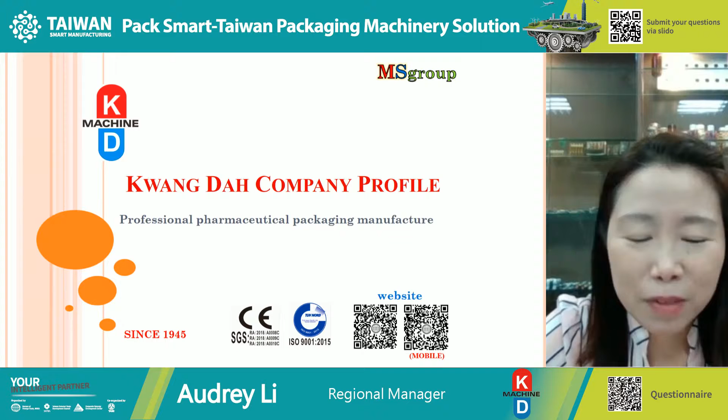Our content of presentation today: we are Kwang Dah, the largest manufacturer of pharmaceutical packing machinery in Taiwan for 75 years, and that's why we say we are the most professional one in the packing industry. There are more than 30,000 machines sold by us in 70 countries of the world. We are an expert not only in customized OEM and ODM, but also Industry 4.0 technology of smart machinery. We will have more detail, description and video later.

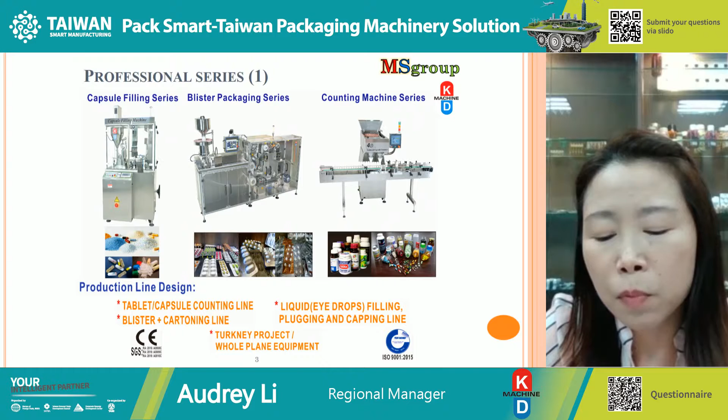Our major equipment includes the capsule filling machine, which uses a tube filling system that can fill powder or granule into the capsule. The blister packing line has a rotary sealing system which can keep your product fresh, whether capsule or tablet, 4 times longer than with other sealing systems. We also have tablet and capsule counting and packing lines with 4D detecting and 100% accuracy counting systems. You may choose to operate an individual machine, or we could combine machines for you to form a production line.

Here are our liquid filling line and cartoning labeling machines. We also have powder processing equipment and turnkey projects. Our major clients are in pharmaceutical, nutrition, health supplement, biotech, natural food, and cosmetic industries.

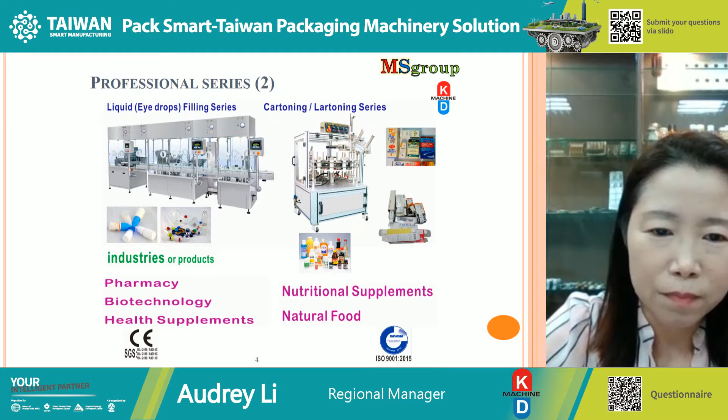Now we would like to talk more about the ability of Kwang Dah. Kwang Dah is a parent company in the Multi-Spring Group. We have 8 companies in the industry of packing equipment, electronics including IC, IT and programming, and land development and construction. Three of us are listed companies. Kwang Dah is the expert in Industry 4.0 smart packing machinery and customizability, because of not only 75 years of experience but also this background.

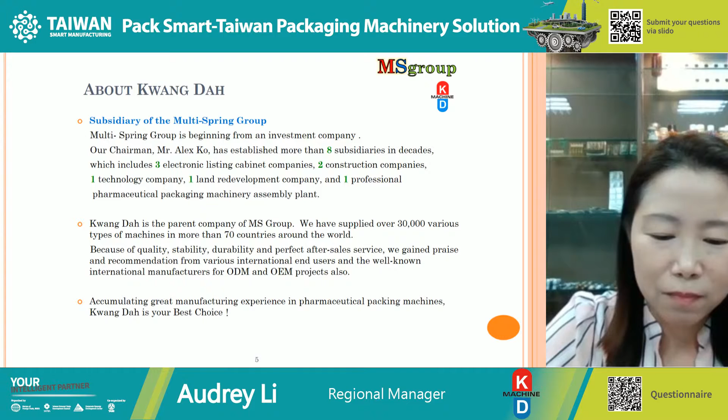As we know, real-time monitoring and management technology, the SCADA system in IIoT, is a common specification for Industry 4.0 machine tools now, but not so usual in packing machinery. We already have the most mature and stable SCADA IIoT technology for smart machines, to help management monitor, control, analyze and correct in real time by your cell phone, tablet, notebook or PC. You will see the production data, including security, utilization rate, preventive maintenance reminders, and even abnormal vibration of equipment on the overview screen.

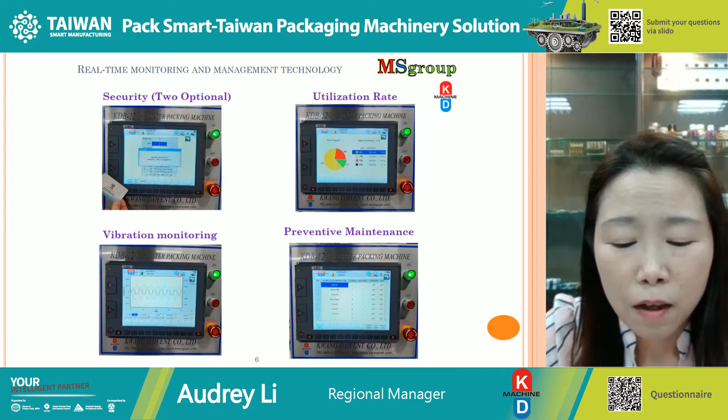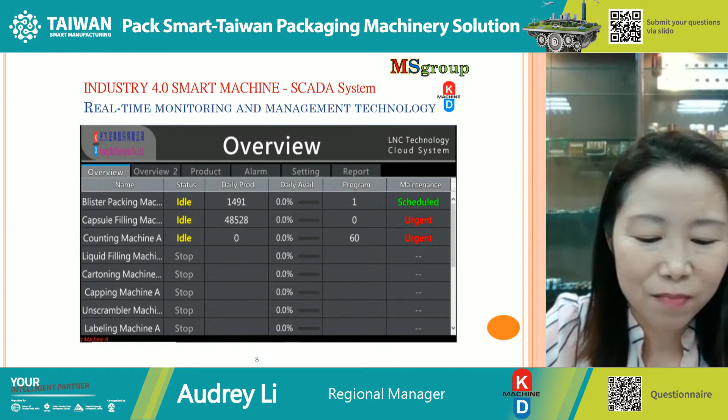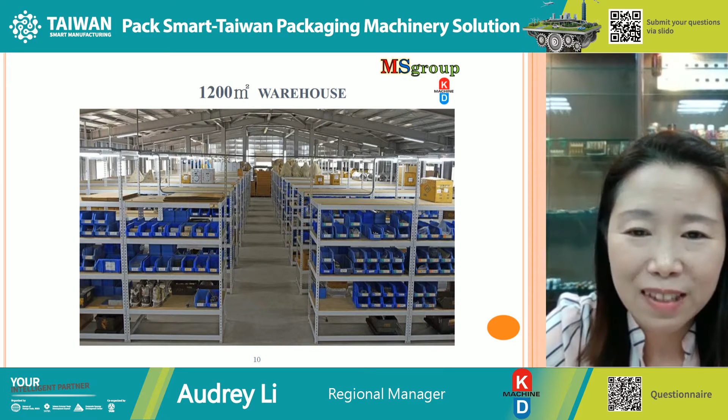We have our own R&D department and QC department to develop products and control quality.

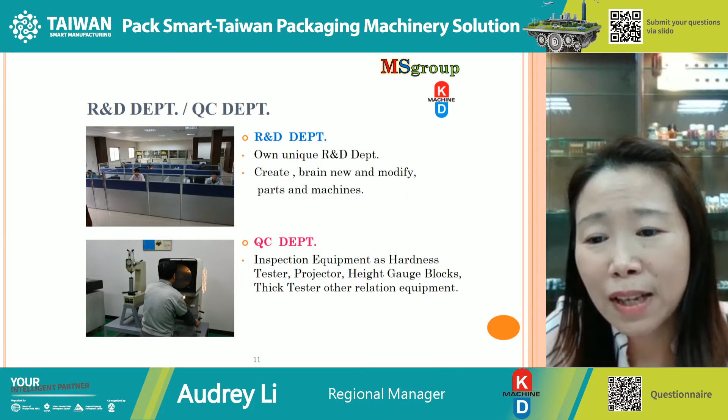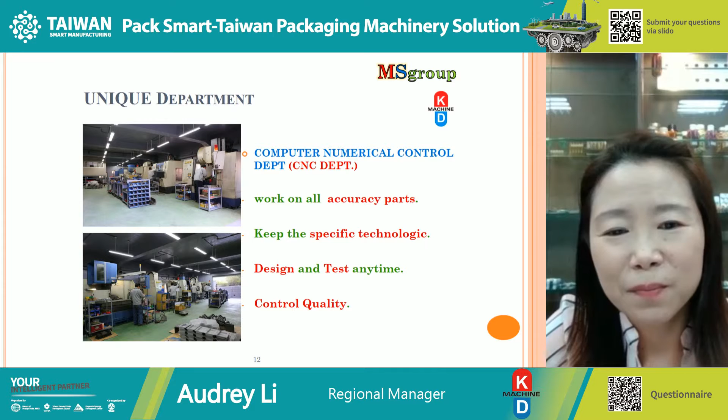We have attended many exhibitions all over the world, especially Interpack in Germany. We've attended Interpack almost 12 times. Because of COVID-19 this year, we will see you at Interpack next year.

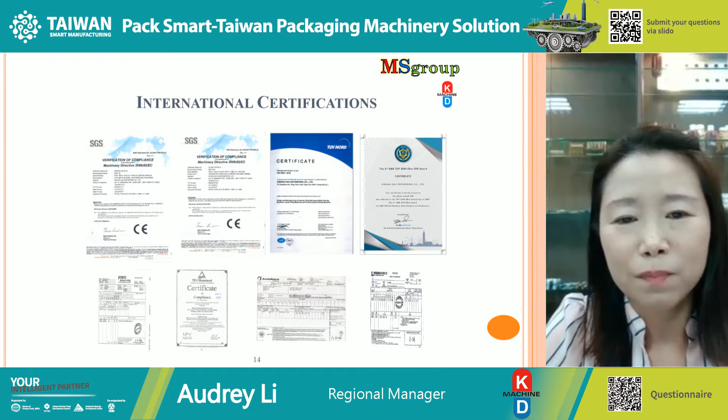Now we have a video to show the high capacity blister packing machine. This is a smart machine which includes the servo and SCADA system, as we mentioned. You will see our feeding device, camera check for detection and rejection, rotary sealing structure, and material collector and output. Thank you very much, and we are looking forward to seeing you soon.

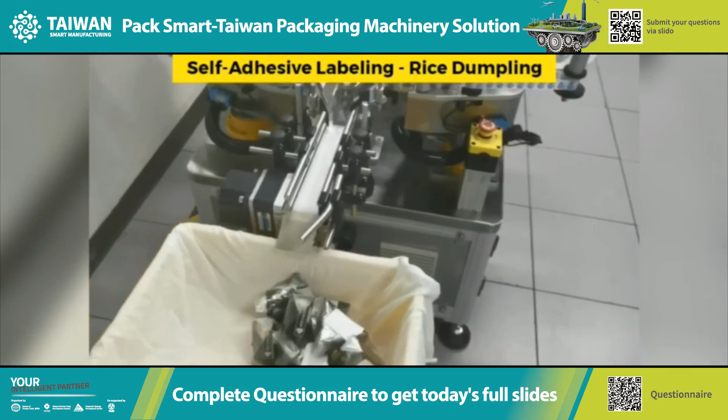Hi, this is Bobby Wang from Markotec Labeling System. As the host said, we were founded in 1976, starting from a very simple coding machine. We now have more than 40 years of experience in labeling machines, and we're one of the earliest labeling machine makers in Taiwan. The good thing is we're still focused on labeling, which gives us the most abundant customized solutions. If you want any kind of labeling machine, whether the simplest standard type or a more customized, complicated type, you can come to us.

By labeling machine, I mean self-adhesive, sticker labeler. Like you can see on the right side, that's the traditional sticker — you can peel it and it has glue on the back. On the left side is the roll-fed OPP film. The businesses we're in are beverage, food, pharmacy, cosmetic, and consumables. Next page.

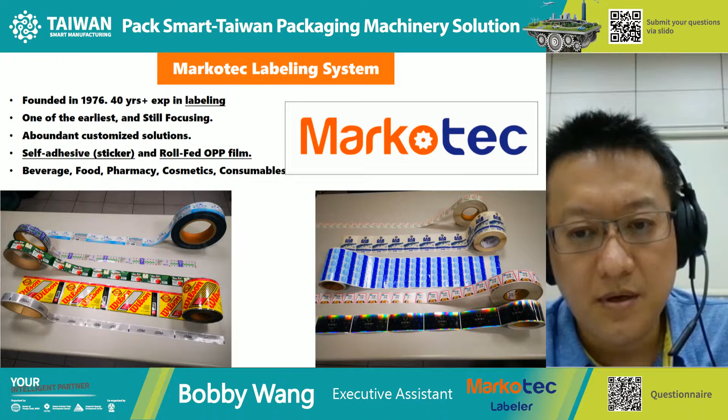The first video here shows a rotary roll-fed OPP labeler, using the OPP film I mentioned. The whole roll is like a plastic film, cut on our machine, using hot melt glue to glue the film and roll it on. This kind of machine can reach speeds of 300 to 600 bottles per minute. In convenience stores, if you see mineral water or soda like in this picture, it's mostly labeled by this kind of machine, because the label is much cheaper than the traditional shrink sleeve. If you see some tea drinks, they're still using shrink sleeve, but their label is much more expensive than this kind of label. Next, please.

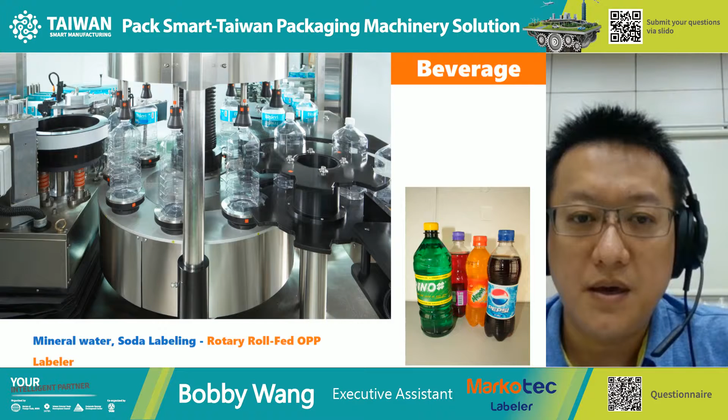This is the rotary sticker labeler, self-adhesive labeler. As you can see here, we have 3 labeling units — this yellow one — so they can put 3 labels on one bottle. You can see in the picture there's a whiskey bottle with a front label, a back label, and a neck label, all in one. In the center is also a rotary station. Next, please.

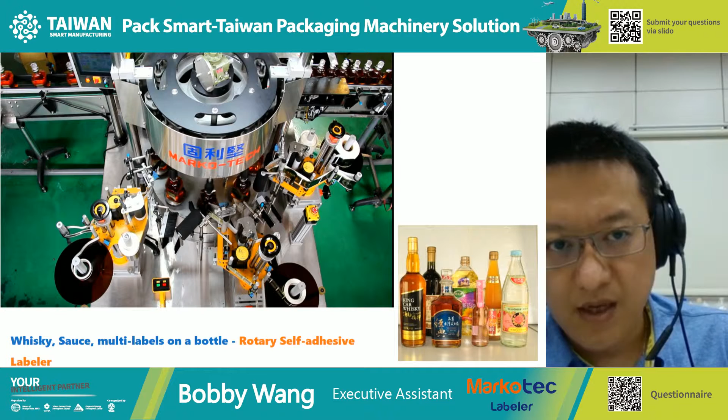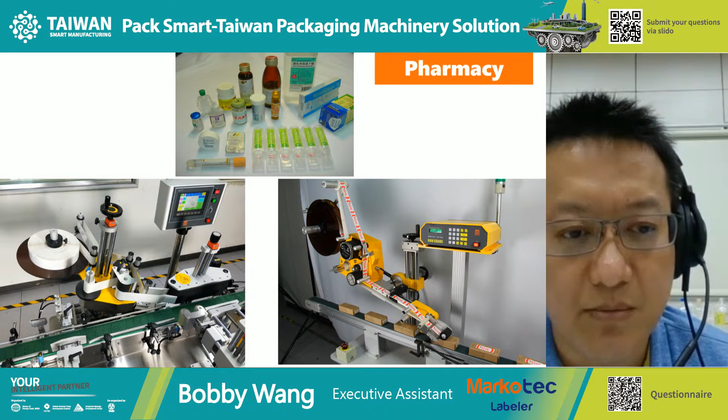These two are the most simple models, we call them simple models. The right one is a simple top labeling machine, and the other is a label for the round bottle. Any standable round bottle can use this kind of machine. These two are the most simple units.

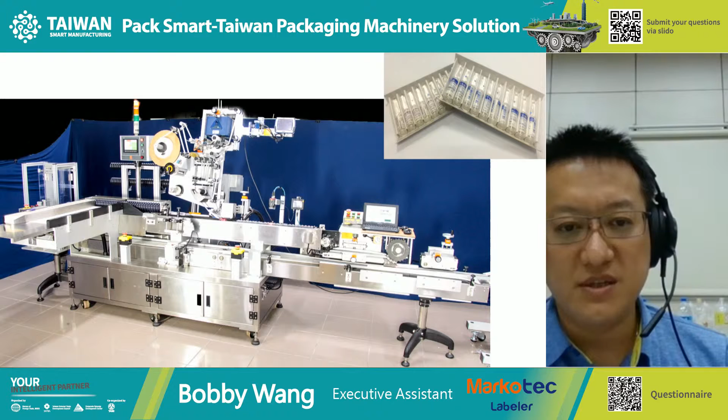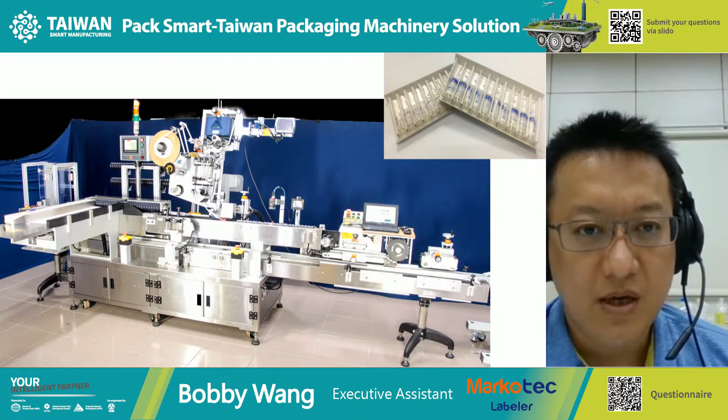Next page. This one is a more complicated and integrated machine. It can not only label the bottle, the little glass bottle, the ampoule bottle, but also do the coding. On top of the machine is a thermal transfer coding unit for the label, and also two CCD checking cameras to check if the typing is okay and to check the label. Underneath is the tray conveyor, so we can automatically put in the paper tray. So it's an integrated all-in-one machine.

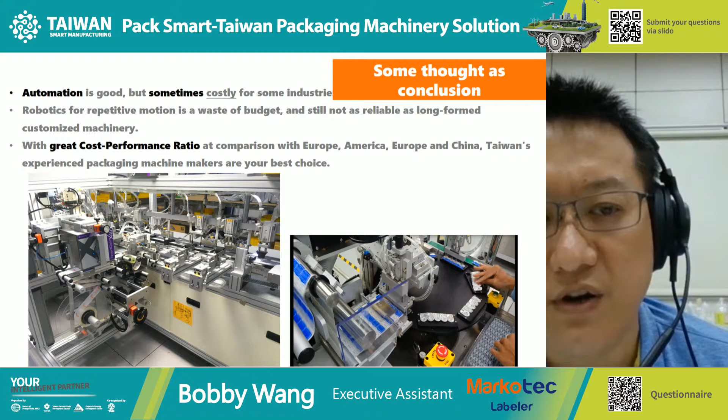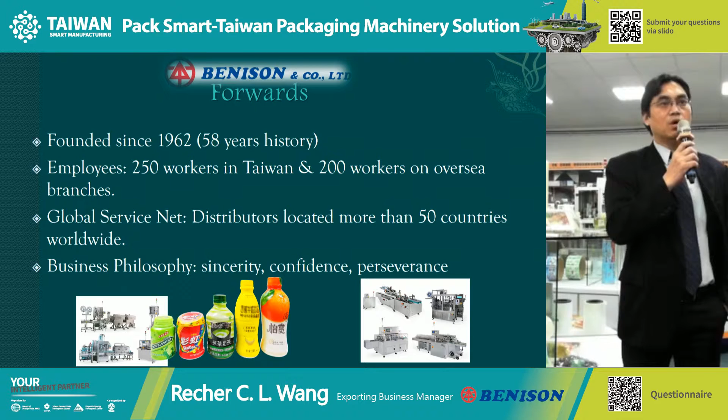We have 58 years of history. In Taiwan, Benison has 250 workers, and another 200 workers in overseas branches. We also have distributors located in more than 50 countries in the world - we can provide service almost all over the world. Next.

In Taiwan, Benison has 4 factories. The first three are making film converting and the machinery, and the fourth one in Kaohsiung is especially just for film producing. We also set up branches in China, Philippines, and Thailand - all of them are now doing well serving the local market. Next one.

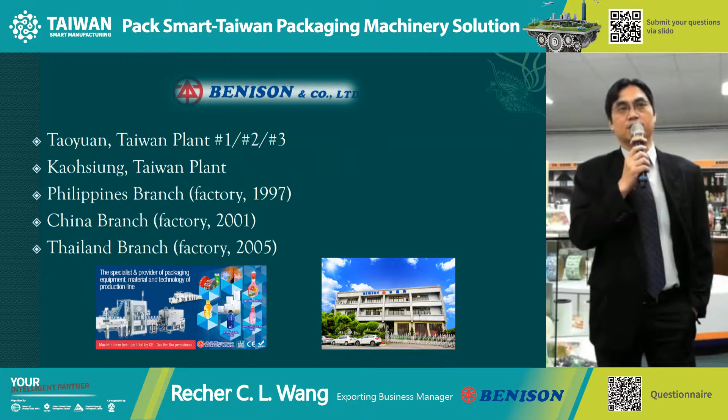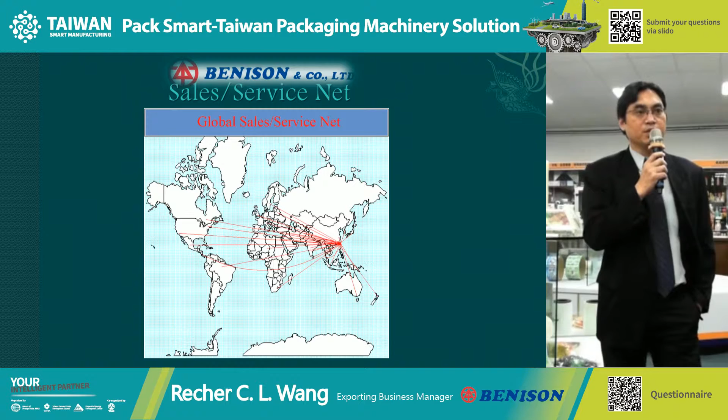Now we are going to show you what Benison has. This is the machinery product we call the shrink wrap. The shrink wrap can pack any kind of product, especially the ones you find in the supermarket, hypermarket, and even some shops. Most daily products can be packed by our machine. I'm going to show you some very popular and common models of the machine in the market.

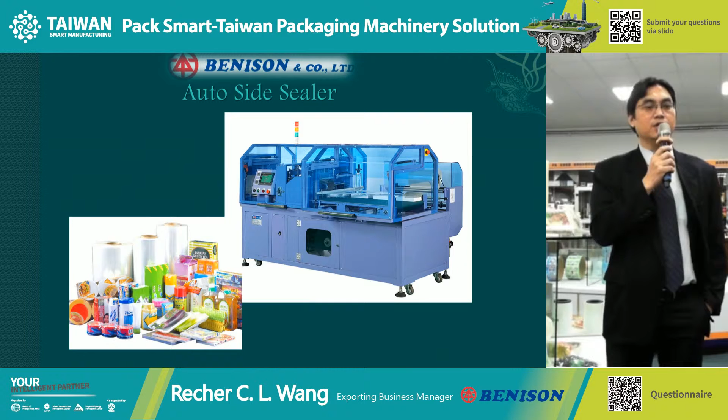First one is the side sealer. The side sealer is higher speed, and the advantage of this machine is the higher speed, and you can pack any kind of product without limitation for the length. If we pack the product at 10 centimeters, 1 meter, 2 meters, or 100 meters, up to you, the machine can all work. Compared to the L-bar sealer, it can have a 1-inch film saving, so this is a high efficient machine with a lower cost. It is an advanced model compared to the L-bar sealer.

So we developed an advanced model, the side sealer, to replace it. We try to replace it, but the L-bar sealer is still popular in the market.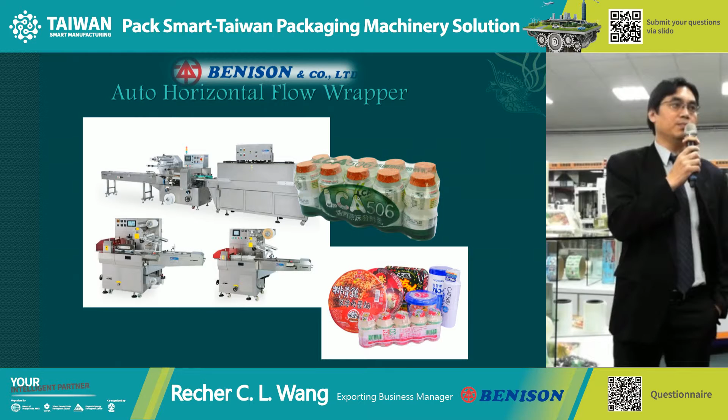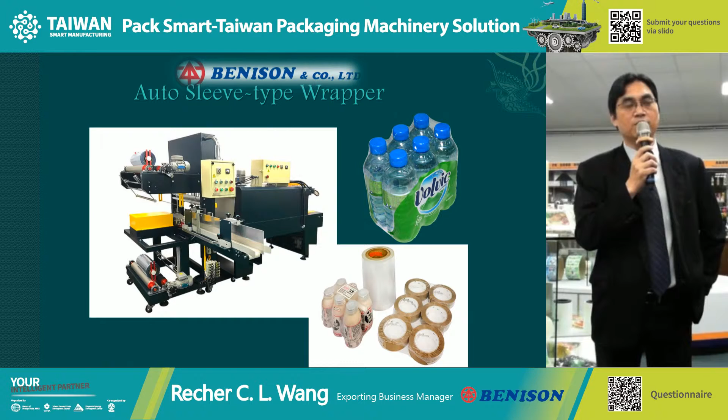This is called a sleeve type bundle wrapper. It's also easy to find in the hypermarket, especially for heavy products. You can have 1 dozen, 1 carton, or a 2 by 3, 2 by 2 multiple package, especially for heavy products like 10 kg or 20 kg. You can work the machine with a thicker PE film to pack the heavy products.

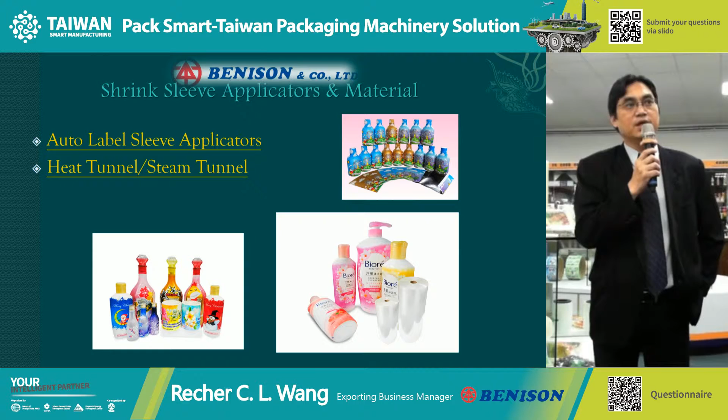Now we are going to another major item of Benison, the shrink sleeve applicator. This is the high-speed shrink sleeve applicator from Benison. We have many different models to match different market requirements. The speed can be 100 up to a maximum of 600, based on customer requirements, and we have different level machines to be provided.

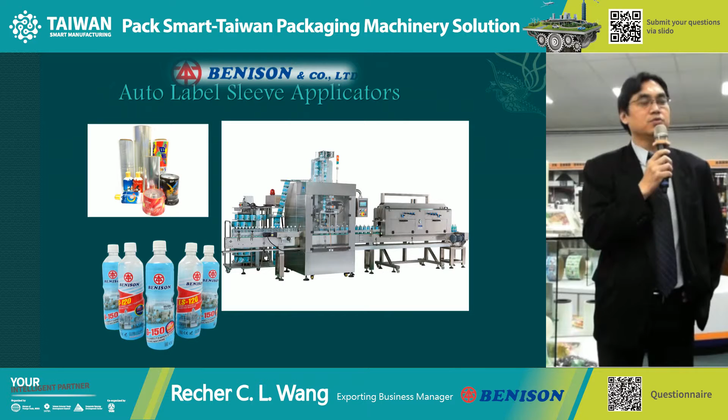You can see the sample bottle here, packed by our machine with the steam tunnel. It can have very good shrink quality. Especially now in the market, people avoid PVC, and most people use PET shrink labels. PET shrink label is quite difficult to work with on shrink bottles, so we developed some special technology. Whether steam or hot air, we can work with the PET shrink label to have good quality working.

This picture shows what we have: an AI system, the smart machine working system. On the right corner of the picture you can see the data. On our machine we install features so people can link the machine to your cell phone or laptop. You can move your cell phone or laptop everywhere to control the working system inside your working house. The data shows the machine's working capacity, troubleshooting, defects, and collection numbers to help you with modification and changing your production for higher efficiency.

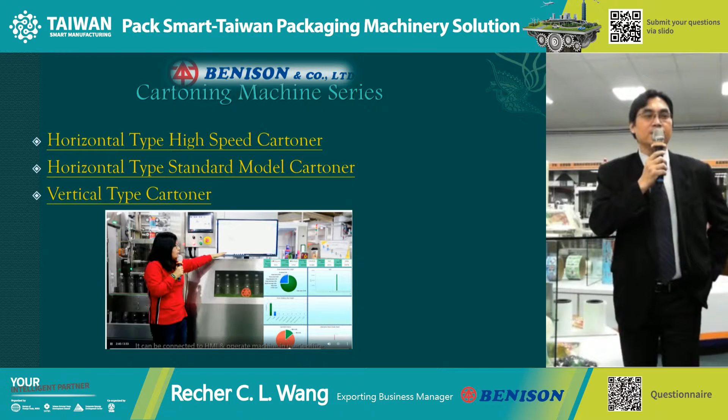This is the cartoning machine, 300 per minute. This is the highest-speed running machine in Taiwan. Benison is the only machine maker for this high-speed machine in Taiwan. So if you have demand for this machine, you can contact Benison. We have a lot of experience working with it.

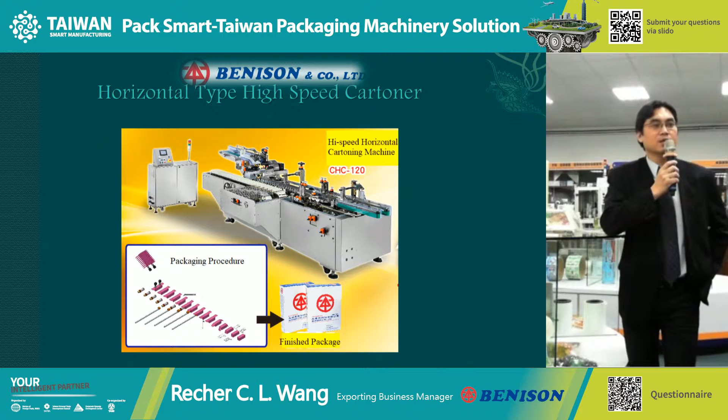This is the standard cartoning machine. Its speed is about 60, for the middle level market. Most people can work with it. About 80% to 90% of customers will find the middle level machine good enough.

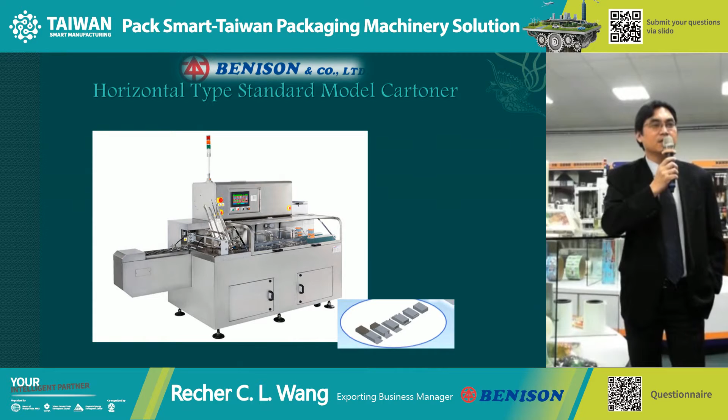This is a vertical cartoning machine. Some products cannot be laid down to fill into horizontal position, so we developed a vertical one to help people. It can help the production.

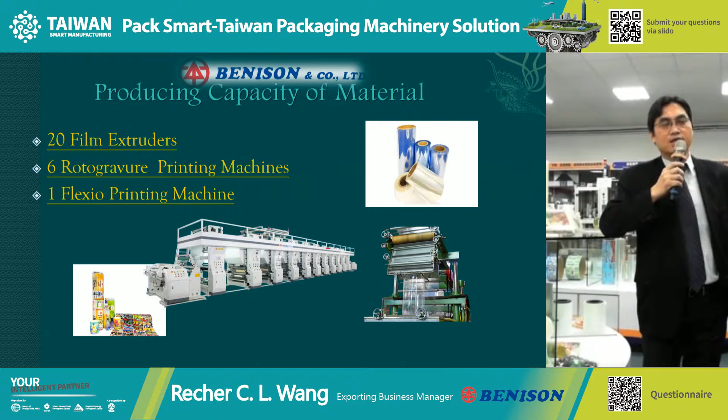Benison has a film extruder for the shrink film, and then we move the shrink film to the Taoyuan plant for the convert print. Benison has 6 rotogravure printing machines and 1 flexo printing machine, and a lot of converting machines like the slitter and rewinder. We have 300 workers standing by to give the best service for our customers with a high quality product.

I'm going to show you one short video of what products we have. If you need more information, you can contact me by email or link to my website. You are welcome to contact us for further information. Please play the video.

We are a professional manufacturer in Taiwan of vacuum packaging machines. We were founded in 1983. We have clients all over the world, and we also take lots of OEM products, for about 35 to 45 brands overseas.

So OEM is not the only product we produce. OEM products only take about 30% to 40% of our total sales. The other 60% is actually selling under our own brand, New Diamond Vac.

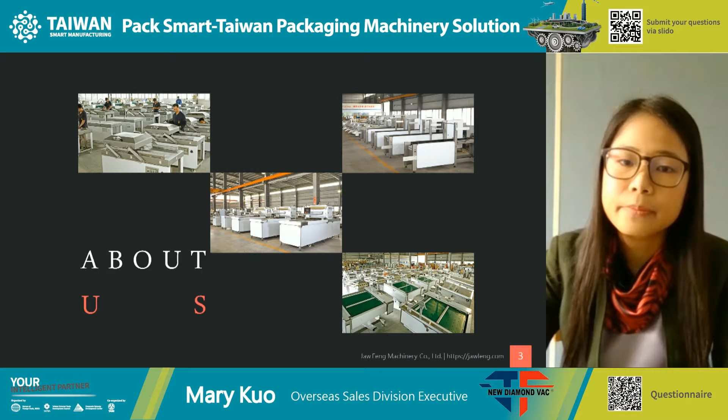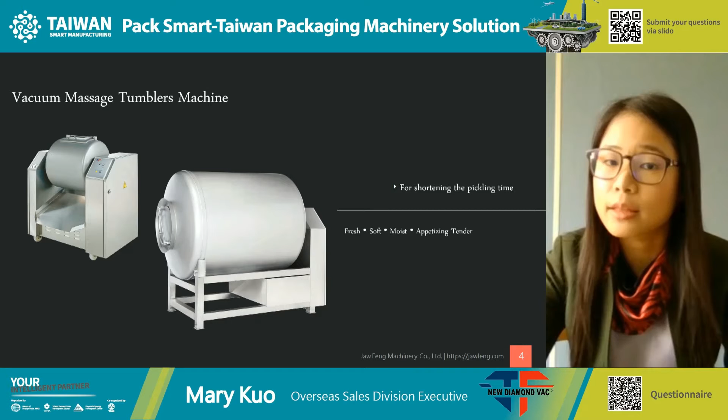Today we are going to give you a little knowledge of what kind of vacuum packaging solutions you will find if you work with us. The vacuum massage tumbler machine is one of our popular machines, especially for the meat industry. This machine works for shortening the pickle time - for example, if you have meat products you'd like to mix with sauce, this is the best choice. We provide a wide range of capacities from 150 liters up to 4,000 liters, suitable for a small cafeteria up to a big enterprise or even the meat industry.

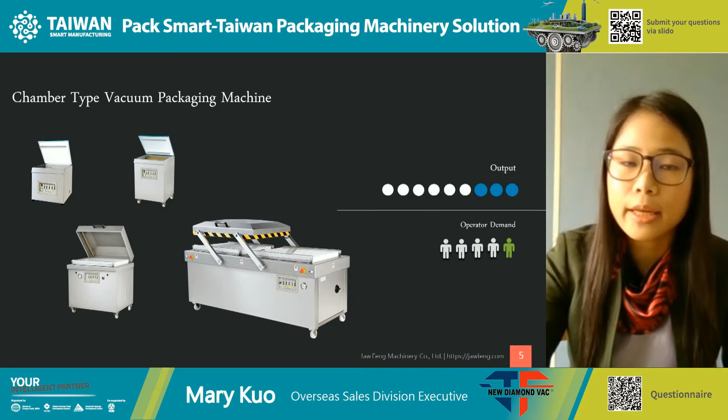With vacuum packaging solutions, this is our main focus. We have different types of vacuum packaging. First, we introduce the chamber type of vacuum packaging machine. This kind of machine has a friendly design, so it's easy even for beginners to use. People choose vacuum packaging because they want to maintain product freshness, especially food, and extend shelf life. For clients with electronic parts or metal parts, they choose vacuum packaging to prevent rust and dampness. The chamber type vacuum packaging machine is a good choice for clients with lower production, and it's a beginner machine.

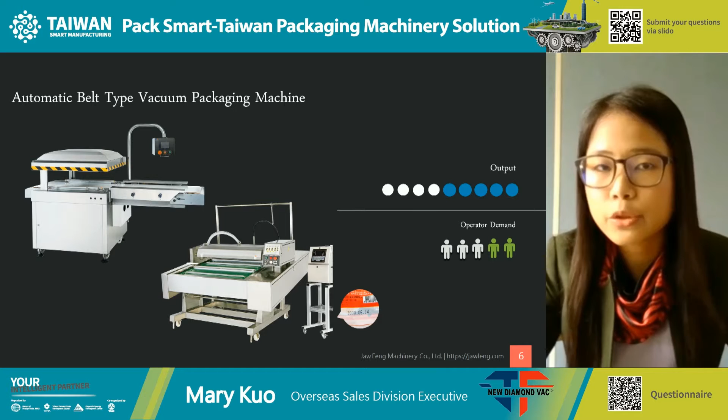So now we move to clients who require higher production. The automatic belt-type vacuum packaging machine is built for clients who want lower operating demands but higher production. Each machine comes with a touch screen and different options. This kind of machine can also be used with a date inkjet printer, so for clients who want to print expiration dates or manufacturing dates directly on the vacuum pack, this will be the best choice.

With packaging solutions, it's always not just one type. What we introduced before is only packing with pouches and bags. Now we'll tell you a bit more about moving to tray packs. Some products, because they want to maintain their shape, if you pack with a bag it will crush the shape of the product. So they consider using a tray instead of bags. This is when the tray sealer comes in.

Our tray sealer comes with vacuum and gas flushing function. Even if you only want a simple seal, you can also choose this type of machine. This kind of machine also requires you to have some air supply, so it's a more automatic design. But with this one, without doubt, you will have a final product with a really beautiful and clear appearance. Packaging by tray is also a good choice for clients.

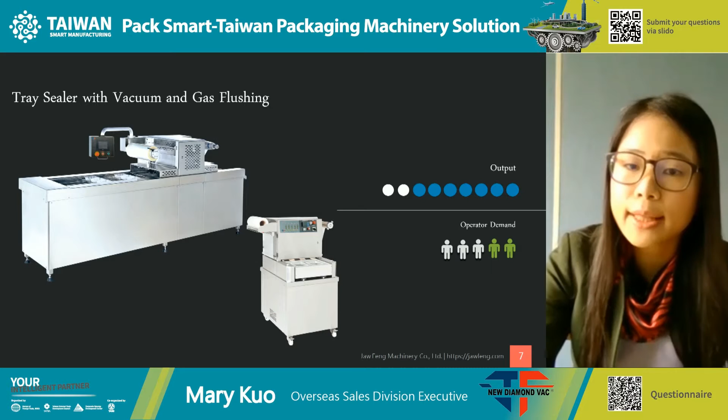For the thermoforming packaging machine, this is actually today's main topic we'd like to introduce. This is the highest efficiency vacuum packaging solution you will be able to get. The thermoforming packaging machine is different from the traditional one. With the traditional one, you need to prepare trays or bags. But with the thermoforming packaging machine, you prepare a raw material which we call film. It will form automatically on the machine into the bags or tray you need. The only thing the operator needs to do is load the products at the loading area.

This kind of machine is more for bigger industry clients who would like to have an automatic line, so fewer operators, but with the highest output level you will be able to get in the vacuum packaging industry. We sell to more than 100 countries. With our experience, we are confident that if you work with us on vacuum packaging solutions, you will find the most suitable products, and you won't need to worry about any maintenance problems. We have more than 40 years of experience working in this area.

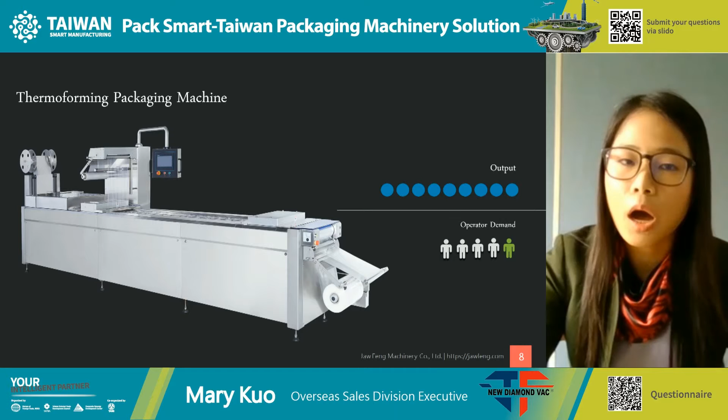So today, this is the brief introduction we wanted to give you about our products.

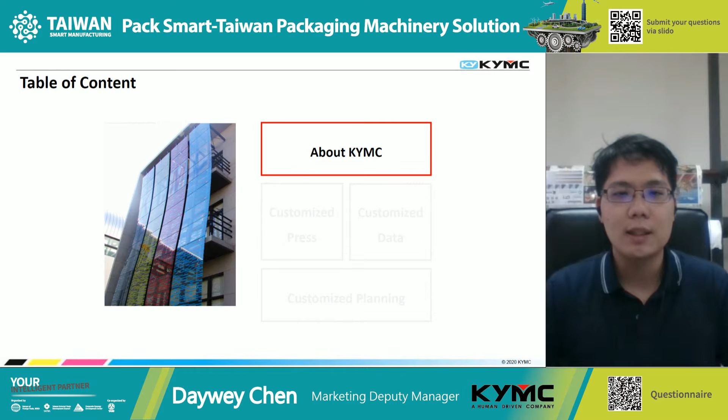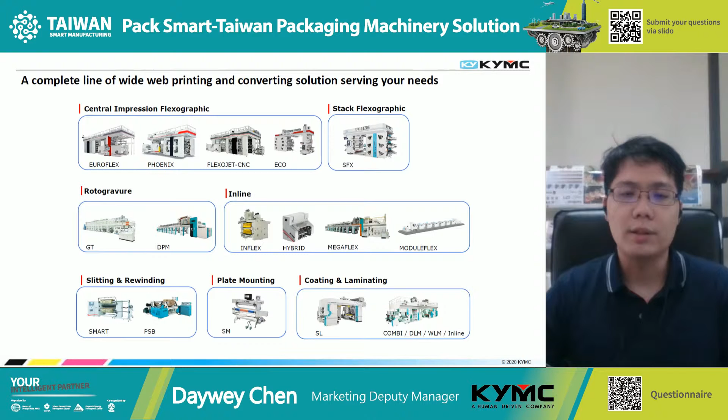To begin with, I would like to share with you a little bit about KYMC. KYMC is a company that has been on the market for over 50 years. We are a wide web solution provider for the printing and packaging industry. Our production line includes central impression flexographic press, stack flexographic press, rotogravure, inline which includes the preprint for the corrugated industry. We also have slitting and rewinding on the converting side, and a plate mounting machine. In recent years, we've also focused on coating and lamination product lines, which include solventless lamination, dry lamination, wet lamination, and inline coating station, which we'll talk about later.

At KYMC, we focus on the things that matter to you the most. If you don't care about it, we don't waste our time on it. So what do we think our customer cares about? Our core values include innovative customization, total solution, human-driven, and affordability. Today we're going to focus on the topic of customization.

Why does customization matter to you? Why do you need it? Well, because customers nowadays are demanding more and more. They're demanding shorter lead time, cheaper price, better service, fast response, and it all has to come with good quality. Wouldn't it be great if your customer told you, yes, we want a fast response rate but we don't care about the quality? No, right? They want everything in one package.

Let me share with you - especially today, we are seeing a trend in shorter lead times. For instance, for those of you familiar with Amazon, before they did 2-day delivery, and now they are doing next day delivery. Why? Because customers want it fast. They want it now. Therefore, as a supplier, we need to be efficient in our operations in order to fulfill the customer's needs.

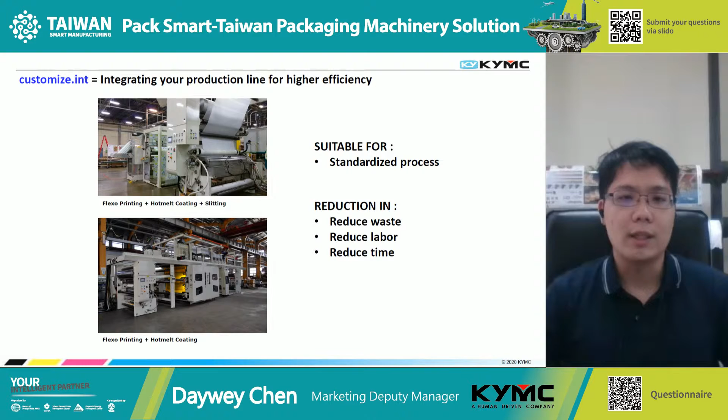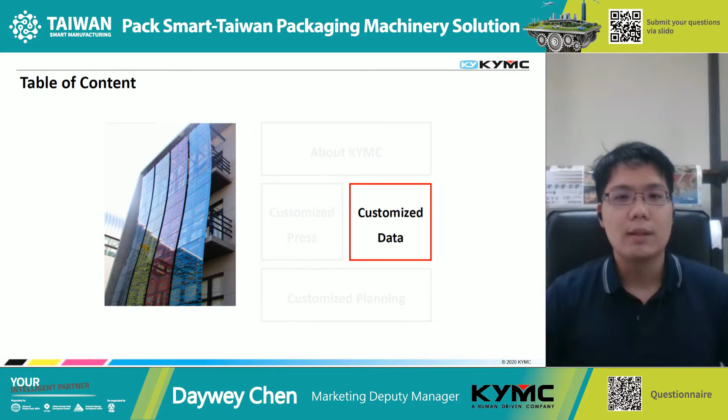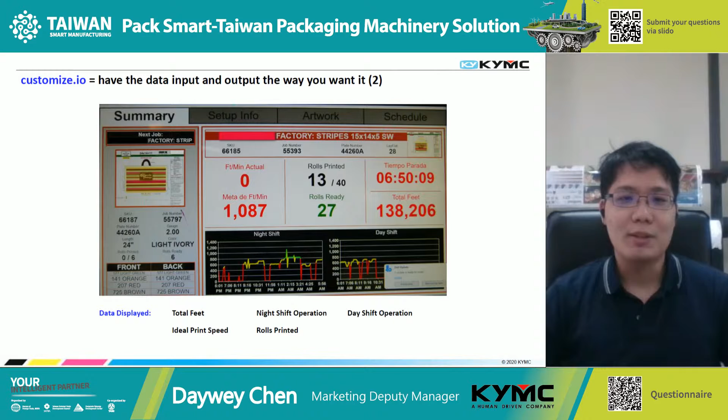This screen is good for managers, but not as great for operators, because all their production data is graphed out on the screen so managers can clearly see their production efficiency. On the screen, you can see the night shift and day shift operations have been graphed out, along with other information including rolls printed, ideal print speed, and total feet printed.

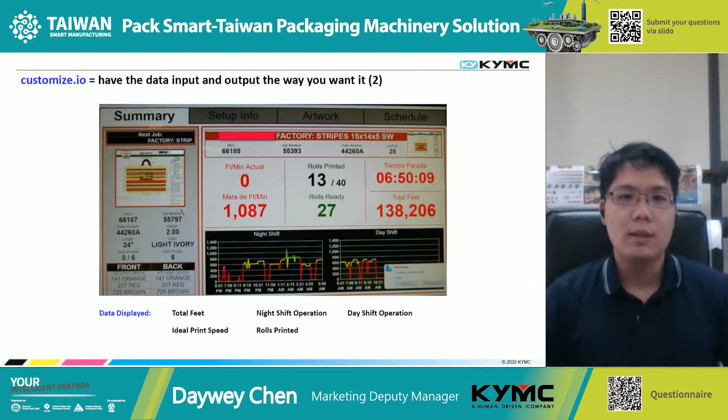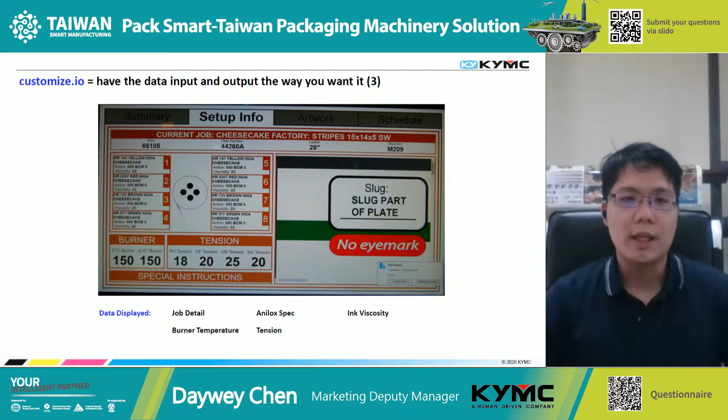This is a screen of a detailed job description - for instance, the job detail, the burner temperature that should be set up, the anilox spec, the tension that should be set at, and the ink viscosity that should be used at each station.

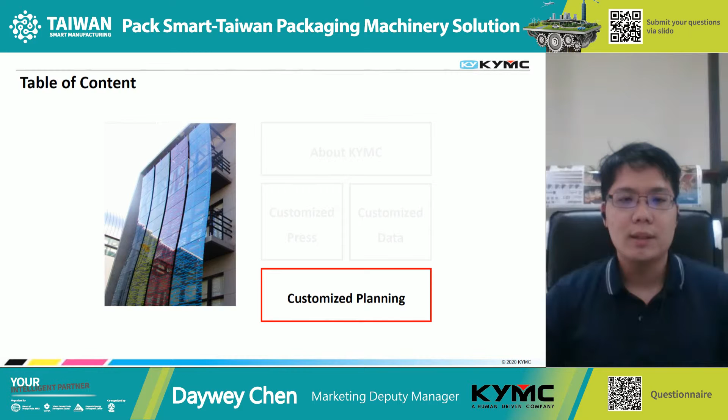Lastly, customized planning. I'm showing you here a case study of one of our existing customers, Chinli Plus. Chinli Plus is a publicly traded company in Malaysia. The issue they were facing at that time was that their customers, the brands, were demanding them to provide a more environmentally friendly solution. At the same time, Chinli Plus also wanted to expand their production line to take on materials such as LDPE. So they came to KYMC and told us they were currently using the rotogravure process, and believed the flexo printing process could help them achieve what they wanted.

But there's one problem - we don't know anything about flexographic printing, so please, can you help us? So KYMC started the project with Chinli Plus.

We gave them extensive training on the machine components, the technical printing operations, and experience sharing. We even went to their factory to give them advisory on how to set up their factory for the flexographic operations. We even advised them on what kind of operators they should search for in this kind of flexographic printing. And we gave them a recommendation on parts suppliers.

And the result was great. The feedback that we got back from them was that they were able to get a cost saving of 30% on the flexographic press when compared to the old rotogravure process. And of course, their production line is now being expanded, and therefore an increase of customer base and an increase of revenue. And they were able to achieve this all within 1 year.